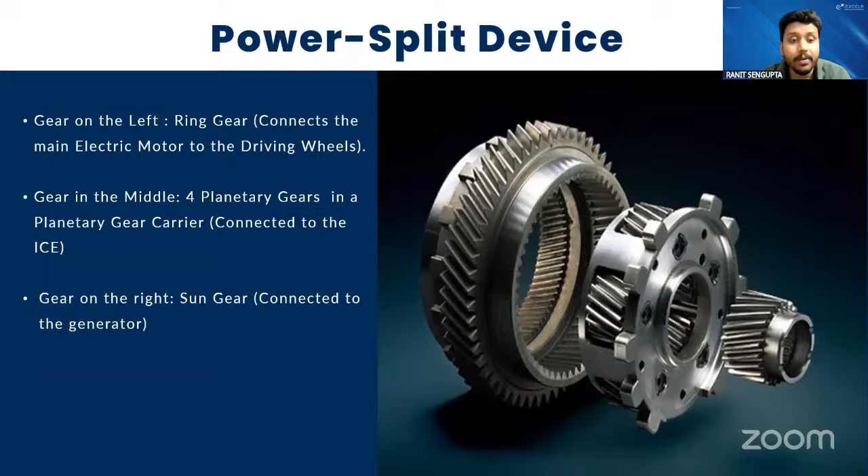So I think you can understand how we are connecting those main components with each other. This is the internal block of a PSD. Now how will it work? Okay, let me share another screen.

So I hope you can see my latest screen. Let me zoom out. I hope you can see the transitions as well.

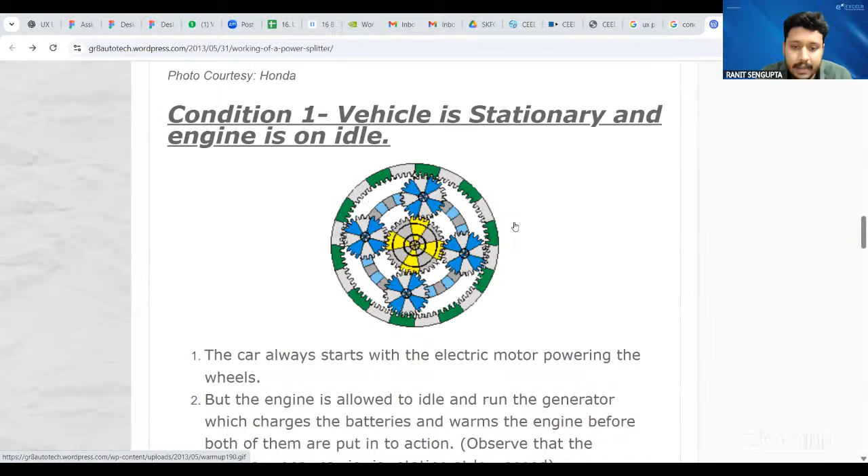As well as you can see that the small sun gear is also rotating, right? And these four gears are nothing but the planetary carrier gears, or we can say pinion gears. So whenever we are starting a vehicle, and mainly I am talking about HEVs, hybrid electric vehicles, on that condition we are not moving, right?

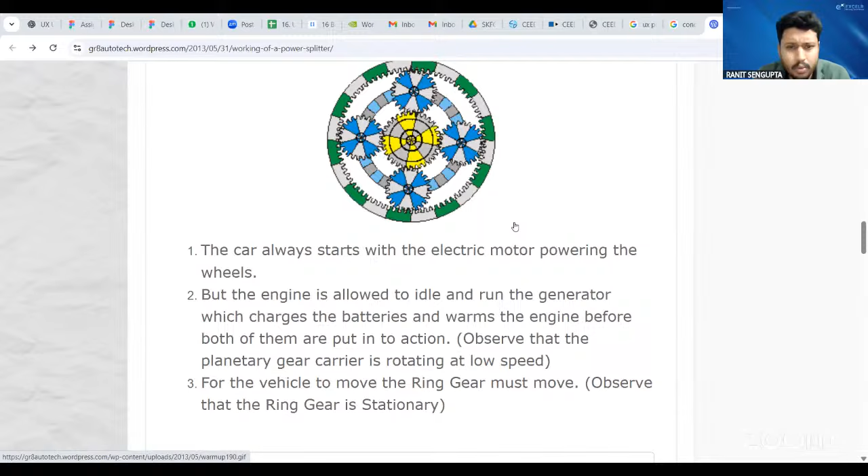And whenever we need a very low speed transmission, or we are in a stationary state, your motor will be in a stationary state. So this is the condition. Now let's see.

Four small gears are rotating because we need to connect the generator with the motor, because all the components should be connected with each other: the carrier gear, the ring gear, and the sun gear. The sun gear is connected with the generator. So please note these three gears, and which component is connected with which gear. Now let's see condition 3, that is the acceleration.

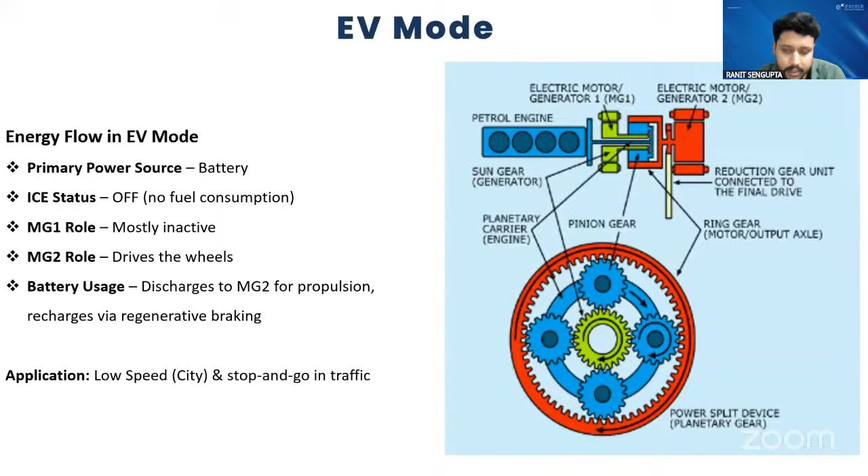And obviously regenerative braking takes place whenever we are doing the deceleration. As yesterday also I told you, there is a difference between deceleration and braking, right? So you can see the application. This type of EV mode application is for low speed transmission, or city driving especially. From the block diagram itself on the right hand side, you can understand how it works, right? Now let's come to the second mode, that is cruise mode.

So cruise mode, whenever you are applying cruise mode, the primary power source would be the engine, and the electric motor will assist, right? So the electric motor is used for assistance only. Here our main power source is the engine, and you can see the application, that is moderate speed, city or highway, where the speed is nearly around 60 kmph, right? 60 or more than 60.

So how does the engine power split go? Obviously the engine power split will drive the wheels as well as generate electricity via the generator, MG1, right? As we know, MG1 is only used for generating the electricity. See, in our normal IC engine vehicles, it may be two-wheeler, it may be four-wheeler, any type of IC engine, do you guys know that we use an alternator to generate the electricity?

As you know guys, there is an auxiliary battery pack we are also using in IC engine vehicles to power the auxiliary loads, such as indicators, headlights, blowers, right? Air conditioning units in a four-wheeler, right? These types of loads come under auxiliary loads, and they are powered by the auxiliary battery pack. I am talking about IC engine vehicles, not an EV.

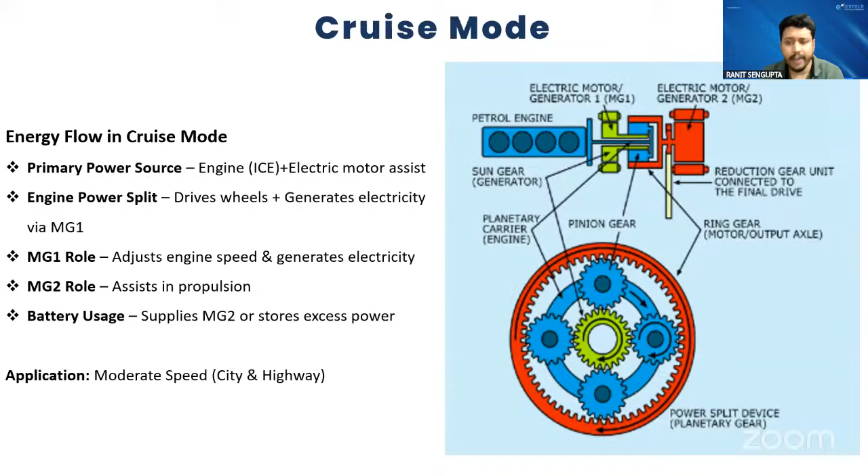Now there is overdrive mode. It is for highway or high speed acceleration only. Suppose the vehicle speed is nearly 100 km per hour, right? In that case, the primary power source is the engine, right? Here we are not turning on our motor, right? So how does the engine power split work? Obviously the engine will drive the wheels as well as generate the electricity.

In this case also, the main work of the generator is to generate the electricity as well as fine tune the engine rpm. See guys, this generator and the electric motor are both connected with a power electronics conditioning unit. We can say this is a controller, right?

So obviously by using this generator energy, we can charge our battery pack, right? And also, here our only main power source is the engine in this overdrive mode. So in that case, obviously MG2's role, meaning the motor's role, is nothing but to assist the propulsion, right? Nothing more than that.

And obviously, if we're talking about battery usage, we are not using the motor, right? We are not turning on the motor. So in that case, the battery may be charged, right? Or it may be in a standstill condition. It depends on the supply and need.

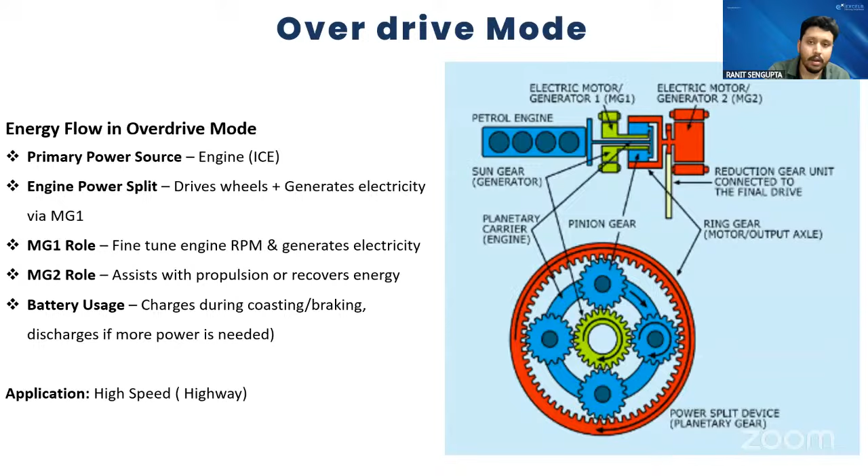Now there is one more mode the manufacturer introduced, that is power boost mode. In this power boost mode, we need the full power of the engine as well as the full power of the electric motor. So here we want to use the battery pack as well as the fuel, whatever it is, petrol, diesel, gasoline. So here our engine power split works the same, driving the wheels and generating electricity via MG1.

Now how does MG1 work? Obviously it generates power for MG2, right? Suppose there is a high need of current. Whenever we are designing this type of HEV, our generator rating is always lower than the motor rating. I have shown you some case studies yesterday as well, parallel hybrid, series parallel hybrid also.

In every case, we have seen that the generator rating is always lower than the motor rating, right? So whenever the motor performs in its high or peak power mode, the generator power is not sufficient. So obviously the battery will be in use. In that case, the motor takes the energy from the battery pack itself as well as from the generator.

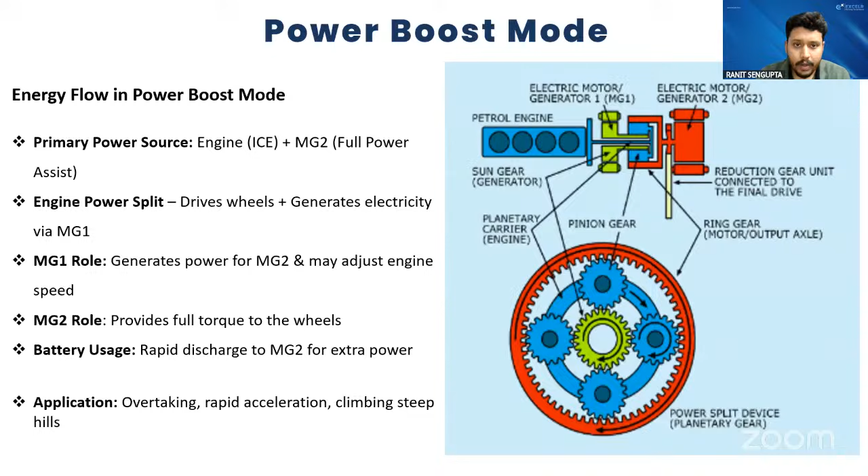There is a question: why do we use two motors instead of one traction motor? It depends on your mode. Whenever there's no need of an electric motor, on an overdrive mode, we don't need an electric motor in that case, but we have to generate electricity to charge the battery pack. We have to recharge our battery pack. So this small size generator is used to generate electricity to charge the high voltage battery pack. In regenerative braking, in case of HEVs, we can hardly achieve 5 to 10% of the lost energy, maximum, and that also depends on the driver. So the main point of using this motor and generator set separately is: when we don't need that much power, the engine will be running, and the generator will be moving and generating electricity to charge the high voltage battery pack. That is the main purpose of using this generator.

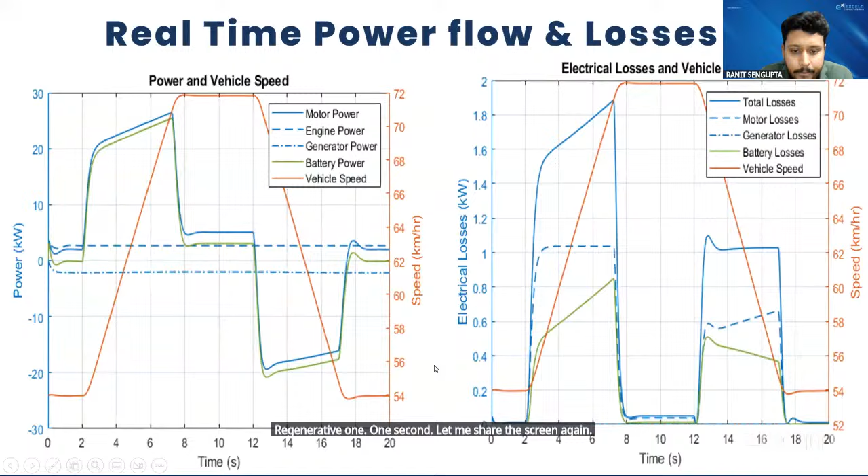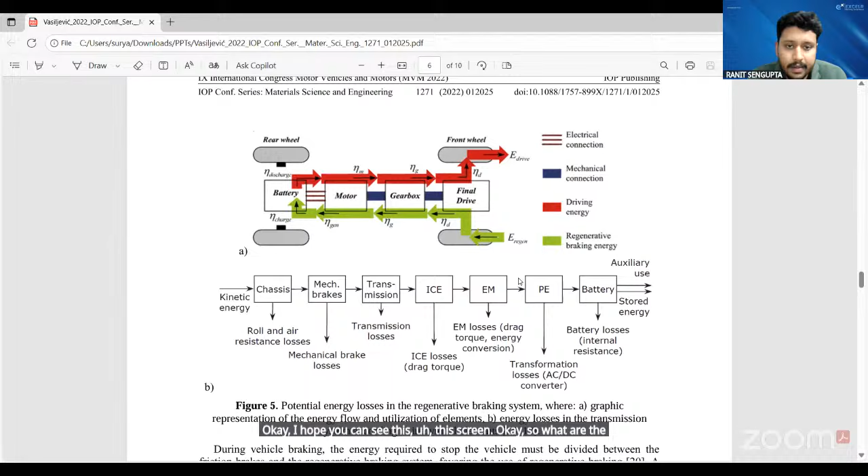Okay, so what are the losses mainly? I will share this paper with you guys, don't worry about that.

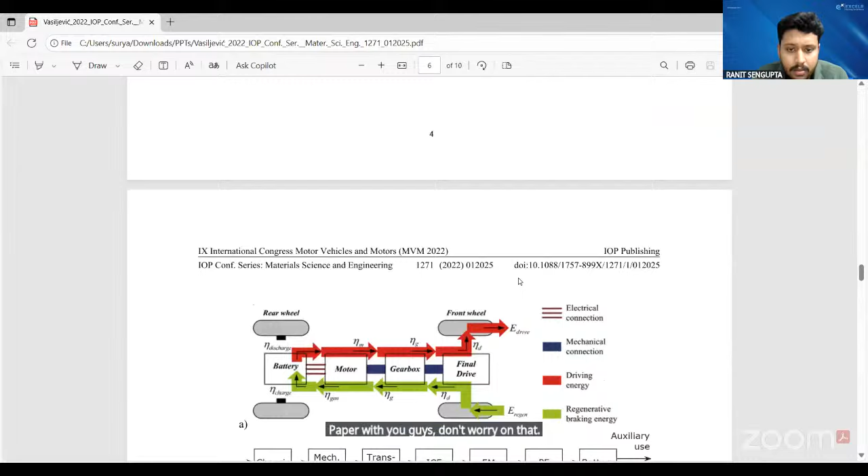On the regenerative braking process, basically kinetic energy is used to generate energy. So how does it work? There's a chassis, and whatever the aerodynamics and chassis design, there will be roll and air resistance losses. After that, there is a mechanical brake loss. Suppose you are applying some mechanical brake, obviously there is a deceleration and you are applying some brake, so there will be a loss.

Suppose you are not applying any mechanical brake, then the losses will be minimal. After that, there is a transmission loss. Then there is an IC engine loss. Since it's a vehicle, the IC engine has its own weight, so there is a drag torque.

After that, there is an EM loss, that is the motor. Whenever we study motor technology, we learn that whenever a motor is running above its synchronous speed, it will act as a generator, and in that case it will generate energy.

In EVs as well, when we're talking about pure EVs, we get more regenerative energy because the motor size is actually increased.

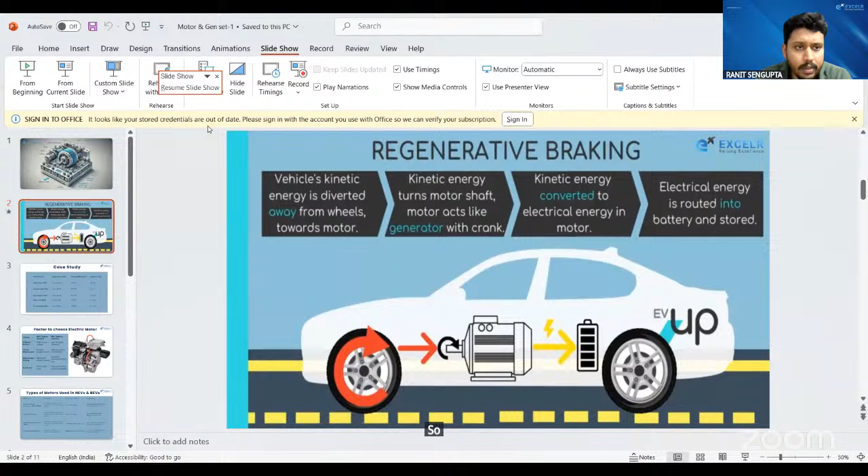So I told you how regenerative braking works. This is a case study on regenerative braking specifically. I have taken 5 models. First, Toyota Prius, a hybrid electric vehicle, HEV. The regain power would be maximum up to 30 kilowatts.

What is the braking efficiency? 50 to 60%. Whenever we drive an EV or HEV, every time deceleration is not possible, so we have to apply mechanical brake. It's driver nature - you will push the brake pedal, that is a mechanical brake. That's why we take the braking efficiency as 50 to 60%.

In case of HEVs versus battery electric vehicles, which we can call pure EVs, the braking efficiency will be more - roughly maximum up to 70%, 65 to 70%. Now, how much range can we gain? In Toyota Prius, the generator or motor size is much lower, so the regain energy is only about 10 to 15%, depending on braking efficiency, friction losses, and aerodynamics.

These 2-3 cases must be considered whenever calculating regenerative energy. For Honda Insight, the regain power is maximum 20 kilowatts, and we roughly gain 8 to 12% of range. In BEVs, the motor rating is bigger because of high initial torque - we need high performance, so we use high-powered, high kilowatt peak motors, and the regenerative power is also higher.

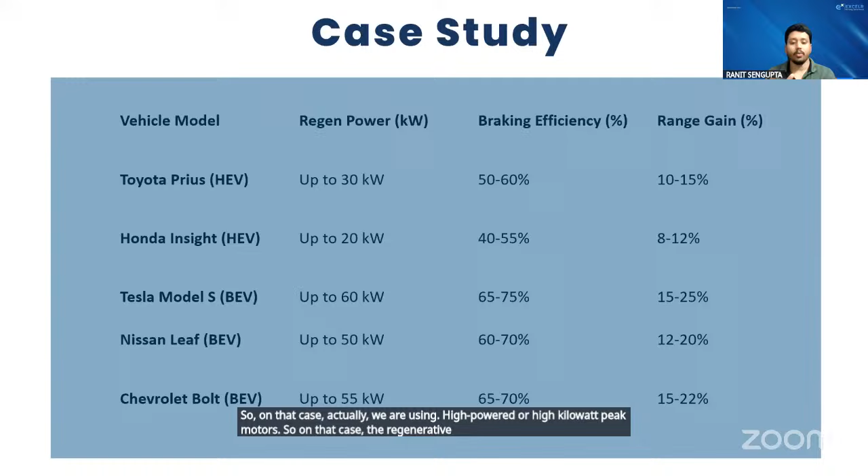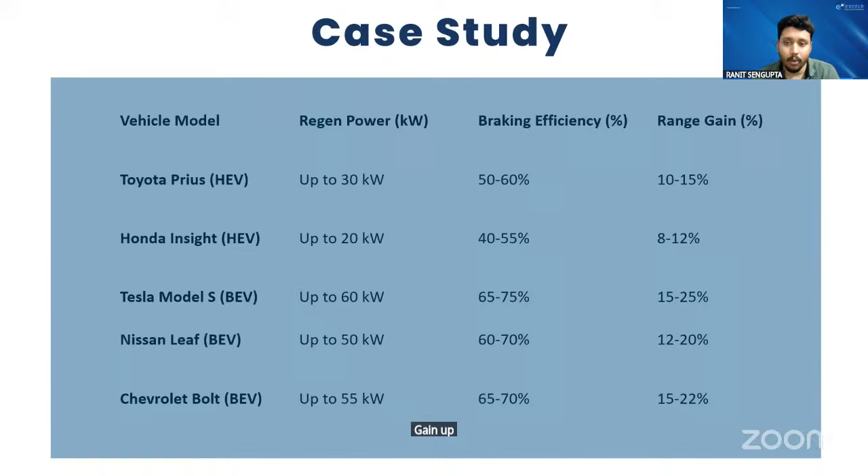For Tesla Model S, we get up to 60 kilowatts of regain power, and the braking efficiency is nearly 65 to 75%, so we can gain up to 25% of the range. Suppose we have a 600 kilometer range - the regenerative energy can add 150 kilometers more.

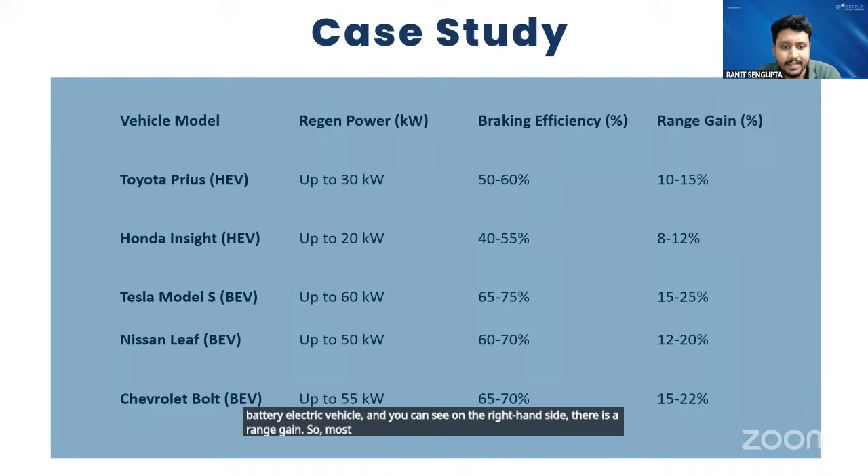So that is the means of regenerative braking work. So in every EV and HEV, we actually have this regenerative braking technology, right? Same for Nissan Leaf, which is also a battery electric vehicle, and Chevrolet Bolt, that is also a battery electric vehicle. You can see on the right hand side the range gain. So most of the BEVs have a higher range gain, obviously. So that is a case study.

Now, what are the factors to choose the electric motor? As one of the students asked, we are using DC motors. For locomotives, actually we were using DC motors for decades, the past 4 to 5 decades we used DC series motors. But now we are transforming from DC motor to AC motor, and mostly nowadays we use AC induction motors. I think we are also planning to do PMSM as well, permanent magnet synchronous motors.

But yes, obviously it needs that type of R&D infrastructure, and also the cost is a factor. Induction motors are very cheap compared to BLDC and PMSM, meaning synchronous motors, because of the rare earth magnets we use. So okay, we will cover this part in the next couple of minutes.

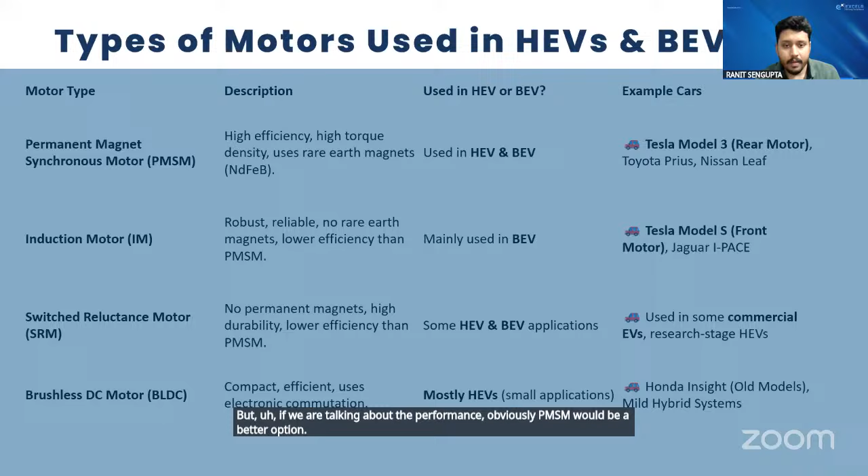Now one of the students asked me why we are not using DC motors. So as you can see, DC motors use brushes, right? There is a brush and commutator we are using. So these two components are reducing the efficiency. Whenever we are using a DC motor, see how an alternator works. Basically in generating stations, as you know, we are using alternators. What is an alternator? That is nothing but an AC generator. AC generator, please note that.

Whenever we are connecting a brush and commutator with this AC generator, it will convert the AC to DC. So primarily we are generating an AC wave, right? And after connecting this brush or commutator, we are getting the DC. So obviously there would be a loss. So in case of AC motors, we are getting nearly 90 to 95% efficiency. But in case of DC motors, due to these two components, we are getting roughly 80% to 85% efficiency. So there is a 10 to 15% gap in the efficiency. So that is why we are not using any type of DC motor in EVs especially.

And you can see that DC motors are much bulkier than AC motors at the same power rating. Suppose we have a 100 kilowatt DC motor and a 100 kilowatt AC motor. So obviously there would be a huge weight difference, right? Because of this brush and commutator.

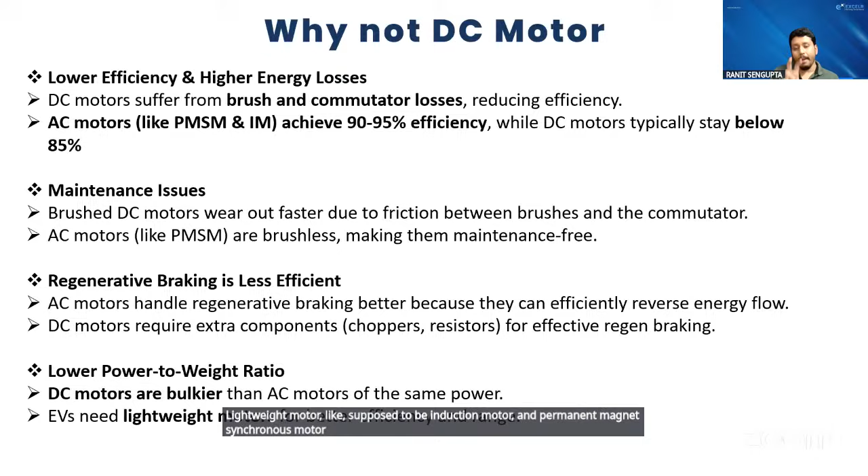So in case of EV applications, we mainly have to decrease the weight. If we can decrease the weight, we can get a very good range. We can improve the range, right? So our main focus is to get the better performance. That is why we are using lightweight motors, like induction motors and permanent magnet synchronous motors. So that is the main disadvantage of a DC motor.

Now induction motors, actually we are using them, right? Basically, how does an induction motor start? Don't focus on the three idiots part, right? How induction motors start: three phase induction motors we can easily start, but single phase induction motors need an external starter, right? So obviously for a three phase induction motor we don't need any kind of starter.

It can start easily. So basically, see, there is a stator and there is a rotor. I am specially sharing these two things for the other branches; mechanical branches also know about it. So the stator is a static part and the rotor is a rotating part. In every motor there is a stator and a rotor, and the rotor is obviously a rotating part and the stator is a standstill part.

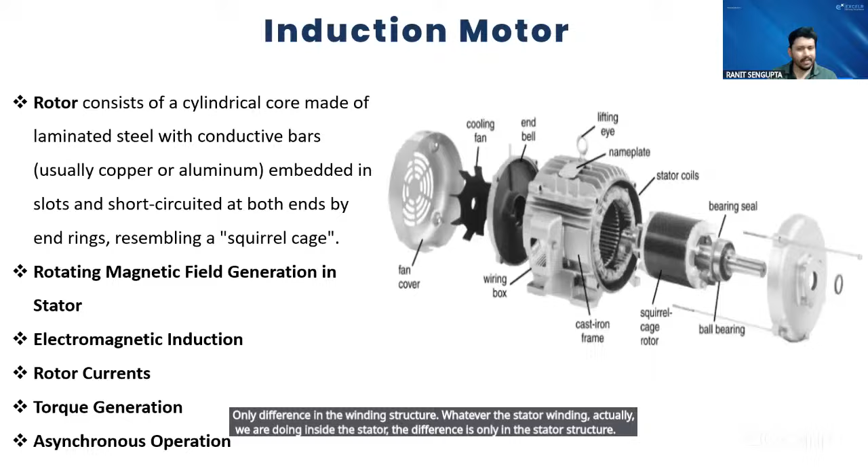Just by replacing the squirrel cage rotor with a rare earth magnet, we can develop the PMSM and the BLDC. PMSM and BLDC are nearly the same. The only difference is in the winding structure, the stator winding we are doing inside the stator. Everything else is nearly the same.

It depends on your speed requirement how many poles it should have. Whenever there is a higher number of poles, the speed will be lower. It is an inversely proportional condition: speed is inversely proportional to the number of poles. If you choose a lower number of poles, your speed will be higher.

There is a maximum speed range. Suppose we need 10,000 rpm; we have to rotate our motor at 10,000 rpm. So you have to design the motor in such a way that you can get maximum 10,000 or 12,000 rpm. That is a part of motor designing. We have to choose the rotor poles accordingly. There is also a dependency on the frequency.

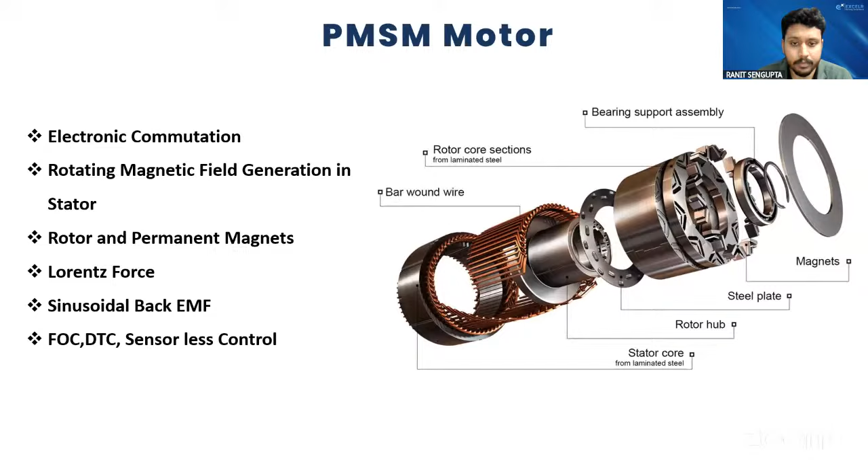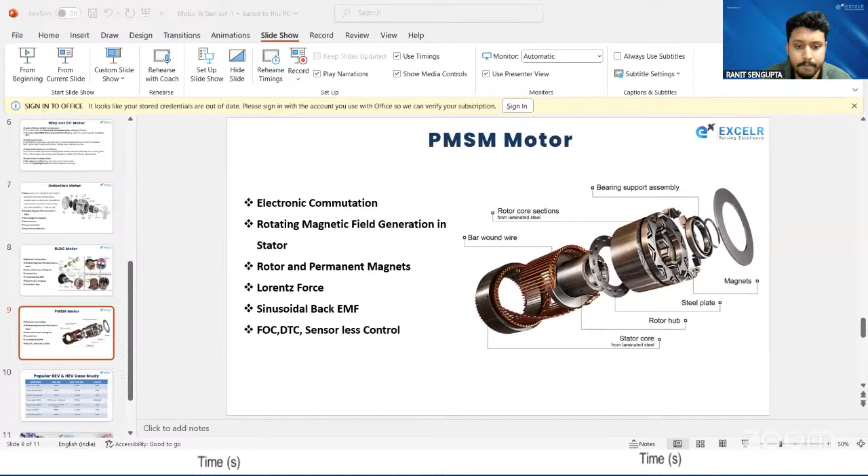Okay, one second. Just give me 1 minute. Oh, 1 second, I am sharing my screen. Please give me feedback. Okay, sorry, what I am sharing. 1 second, guys. There is an issue. Okay, I hope you can see my screen, the car view, right? And please give me feedback whether you are getting the video sound or not.

Tesla engineers made a stunning design choice when they developed the Tesla Model 3. They abandoned the conventionally used, well-proven induction motor. Are you getting the video sound, guys? Please.

Okay, very good. Let's see this new technology that was developed by Tesla just a couple of years back. That is a permanent magnet synchronous motor and a switched reluctance motor. Means we are using both types of motors, right? And we are developing a new motor technology, that is PMSRM. So let's see how all the motors work, as well as how this motor works.

So this is the most efficient motor the EV industry is using nowadays. Obviously, it is very much costlier also. That is why the Tesla cost is pretty high, right? But the performance is phenomenal. BYD is also using this type of motor nowadays. Okay, let's watch this video.

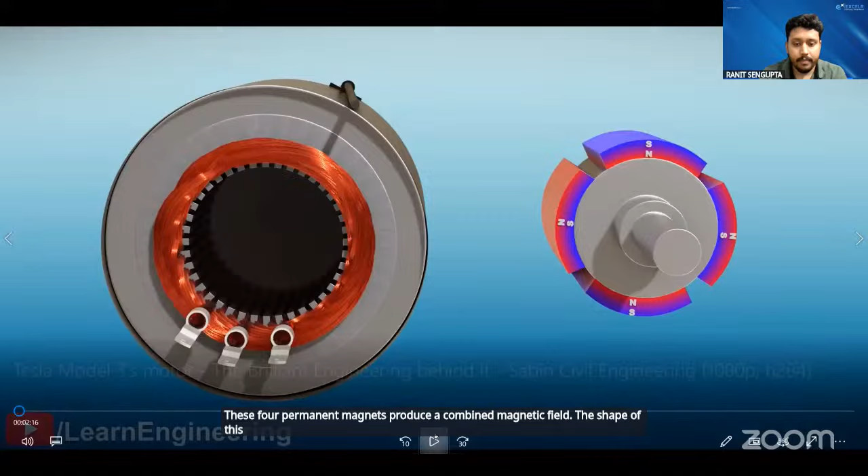See, guys, as you have seen a little bit of the video, whenever we are using the squirrel cage type, we are using aluminum or copper conductors, right? So our main purpose is to turn those copper bars or aluminum bars into a magnet. So externally we are generating the magnetic field inside the rotor. It makes sense, right? Whenever we replace this with a permanent magnet, we don't need to generate the magnetic field, it already has the magnetic field. So it is absolutely clear why PMSM and BLDC are more efficient than induction motors, right? So let's watch this.

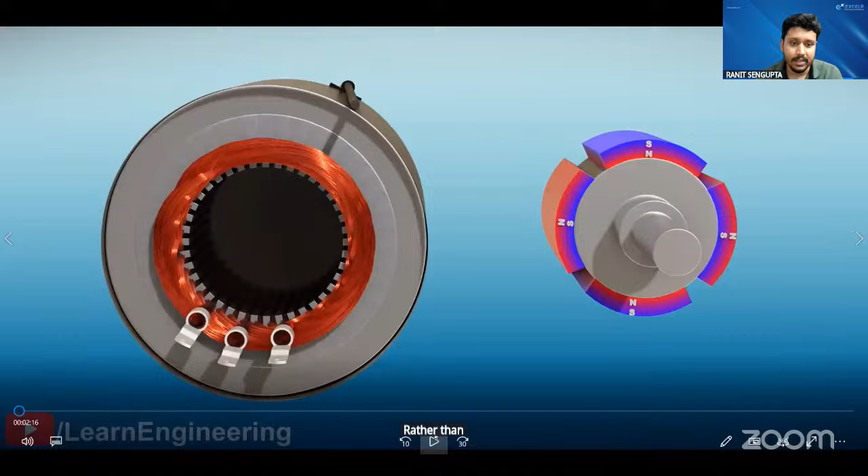Guys, the main motive: why do we want to reduce this back EMF? Obviously we know that in a motor there is a core loss, right? There is a core loss and there is a copper loss. Copper loss is associated with the stator winding, where we are using conductors or wires. In the wires we have resistance. So depending on the current rating, there would be an I squared R loss. So that would be our copper loss.

And in the magnets, there is a core loss. In case of induction motor there is core loss, and in PMSM there is also core loss. But in case of induction motors, we are using copper or aluminum bars, right? So there is a current flowing through the copper and aluminum bars. Depending on the copper or aluminum bars' resistance, there would be a rotor loss, which is pretty high compared to the permanent magnet synchronous motor, or we can say the permanent magnets.

But in the permanent magnets there is a core loss, right? There is an eddy current loss and there is a hysteresis loss. These two types of loss are associated with the magnetic flux. So whenever we are doing a very high speed rotation, obviously the rotor is the main rotating part, so that means your magnet is also rotating.

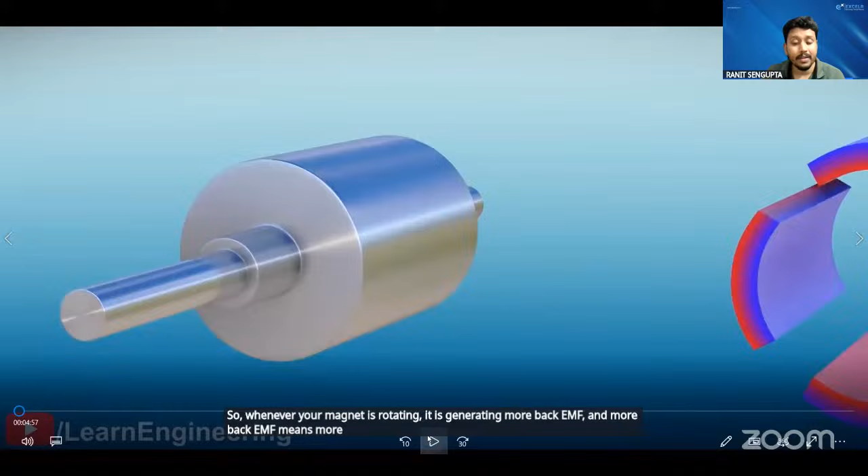So whenever your magnet is rotating, it is generating more back EMF, and more back EMF means more losses, more core losses. So that is the main motive to develop this new motor technology, to reduce the back EMF at a higher speed.

Yes, PMSM is better. It has a very high initial torque. But suppose the vehicle is running at 100 kilometers per hour, 120 kilometers per hour, in that case the rotor rotation is very high. So in that case, it will be overheated, and it would act like a lossy component, right? So that is why we are developing this technology.

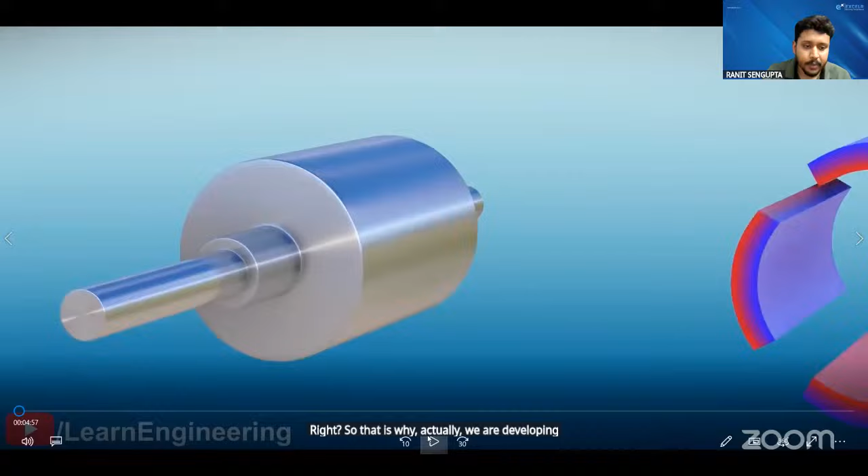Okay, let's watch. See guys, why are we not using only a synchronous motor? That doesn't have permanent magnets, right? I am talking about the synchronous reluctance motor. This type of motor doesn't have any type of magnets, right? In that case, we are using iron bars or steel bars, right? Sorry, conductive bars.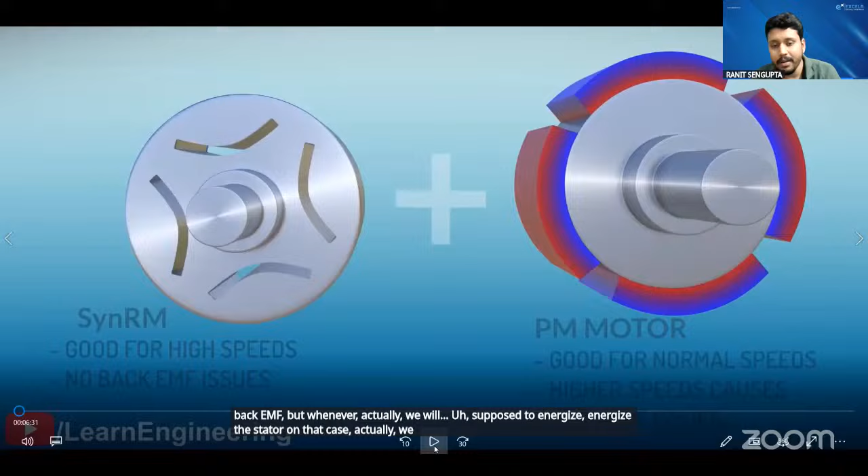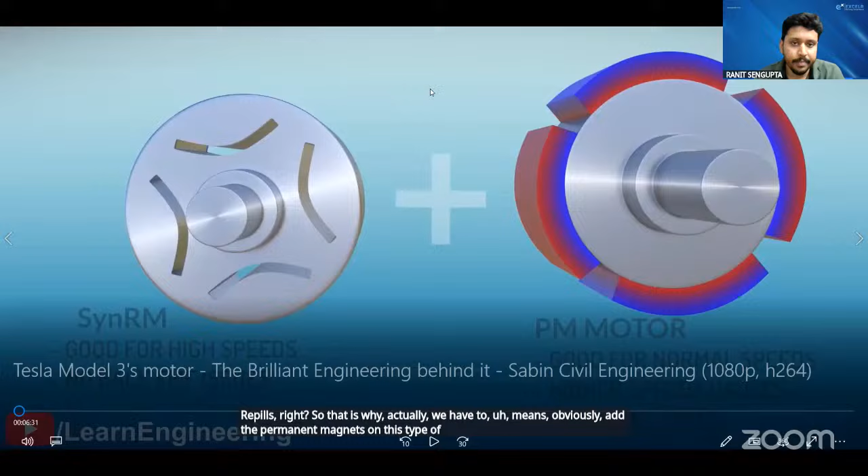So whenever we start this type of motor, there is a very low starting torque, and there are torque ripples and current ripples. Obviously there is no back EMF, but whenever we energize the stator, we will observe ripples, right? So that is why we have to add the permanent magnets in these cut slots, right? So let's watch this overall video.

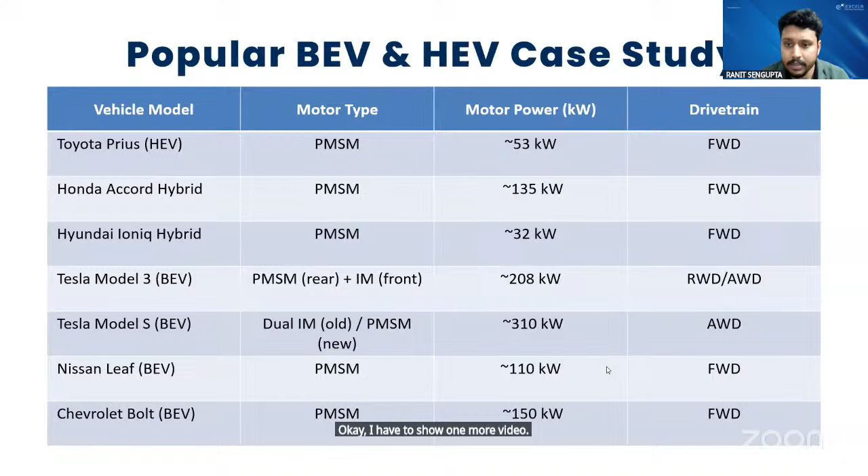Okay, I have to show one more video. One second. Basically, I want to show the Toyota Prius hybrid mechanism. One second, I'm just sharing those videos.

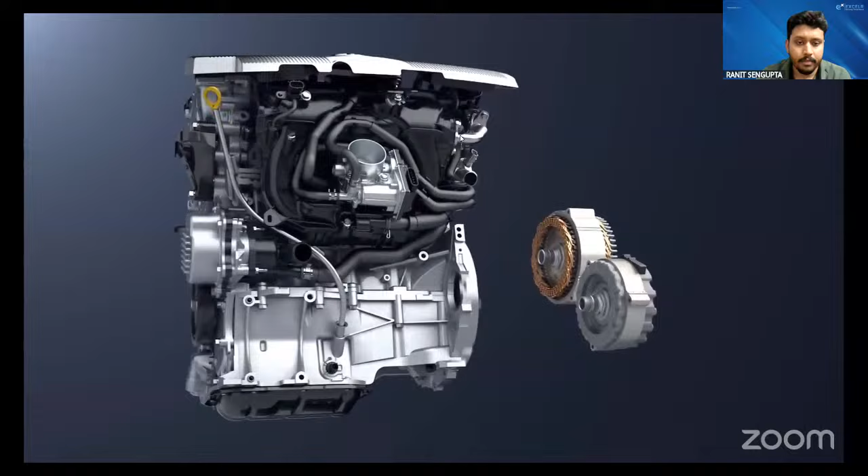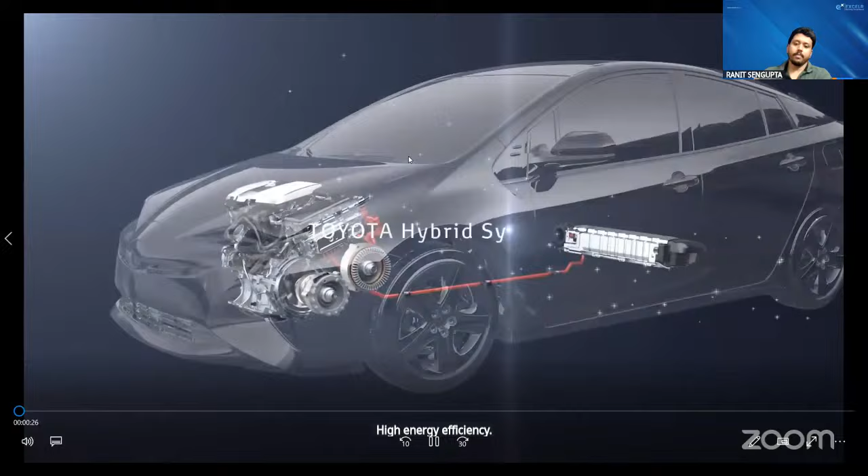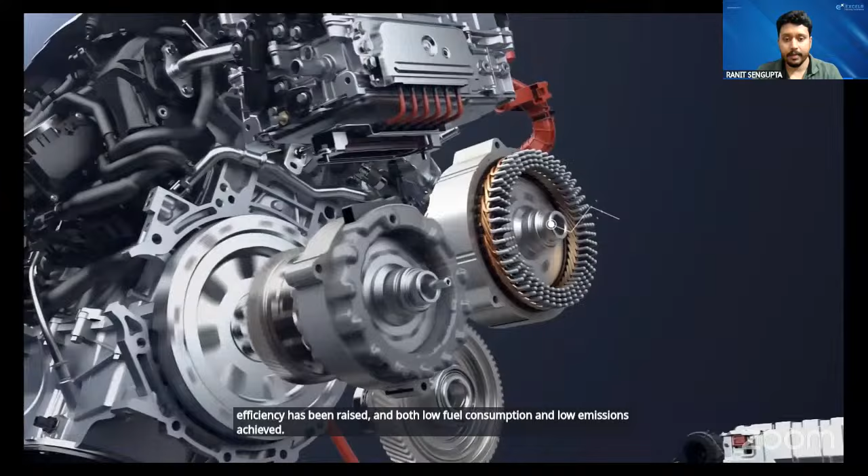Engine and motor. This system combines these with the power split device to achieve high energy efficiency. This is the Toyota hybrid system. Each unit has been developed specially for the hybrid system. For the engine, the maximum thermal efficiency has been raised and both low fuel consumption and low emissions achieved. The motor is compact and high efficiency to achieve smooth acceleration. The generator uses the engine rotation to generate electricity, which is sent to the motor and the drive batteries. It is also used as the engine starter and provides smooth engine starting.

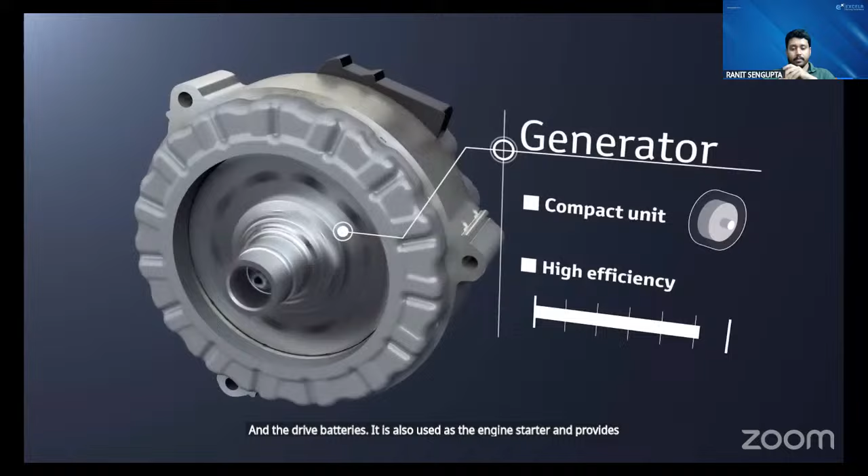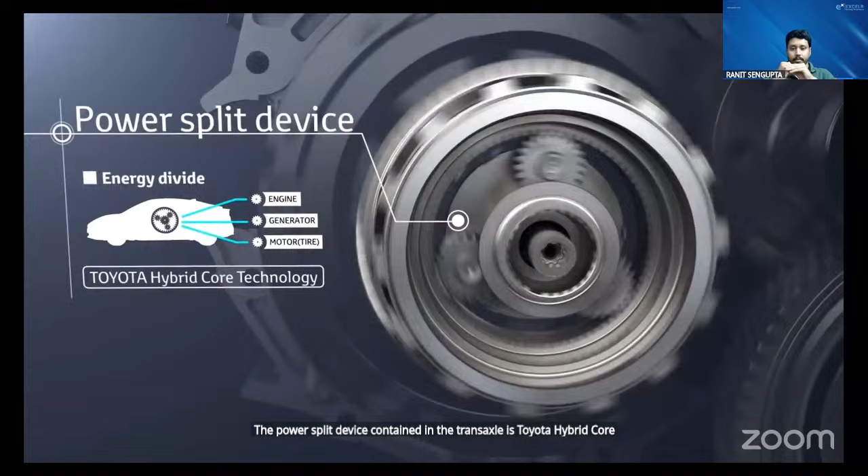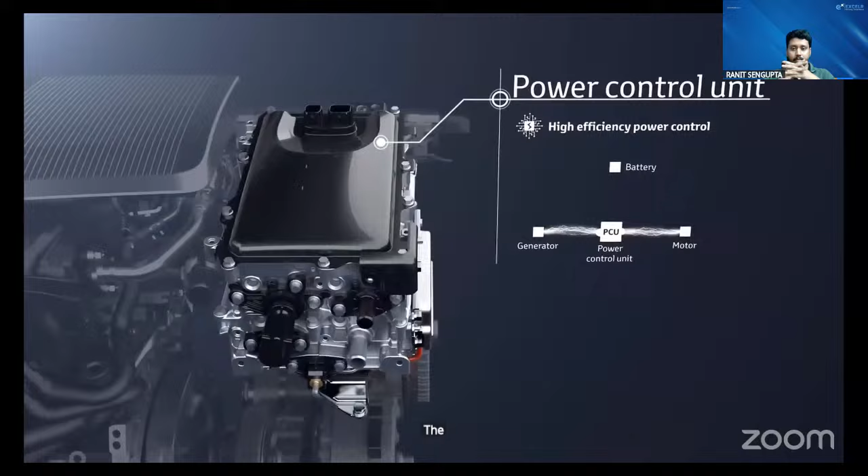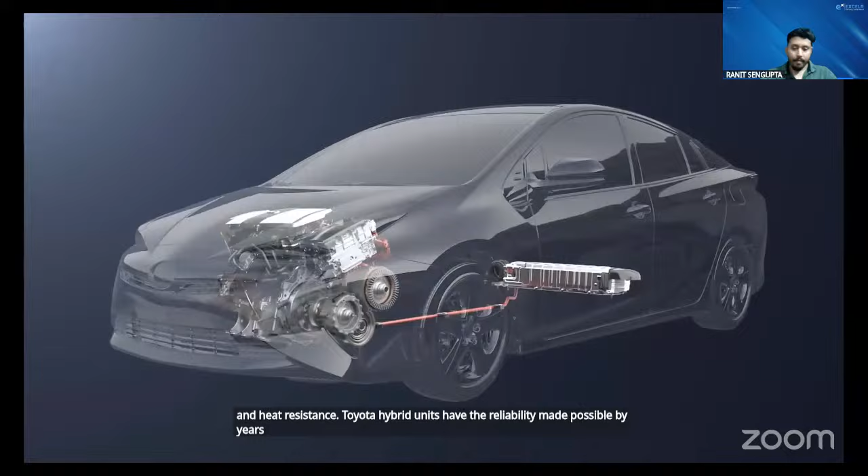The power split device contained in the transaxle is Toyota hybrid core technology that divides the energy output from the engine between electrical generation and driving according to the driving conditions. The power control unit is the core of the hybrid system. It controls the electricity to provide appropriate amount to each unit. The drive batteries store the generated electricity and supply it to the motor to drive the vehicle. There is no need to recharge from an outside power source or to replace the batteries periodically. They also provide superior durability and heat resistance. Toyota hybrid units have the reliability made possible by years and years of design development and continuous progress.

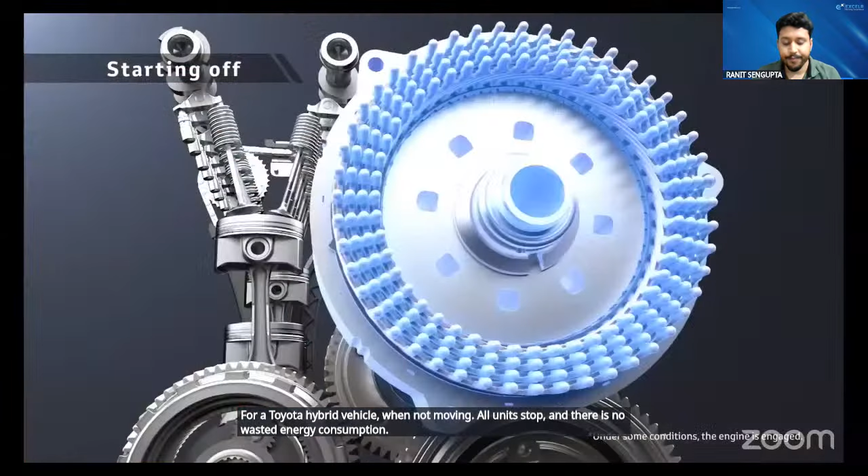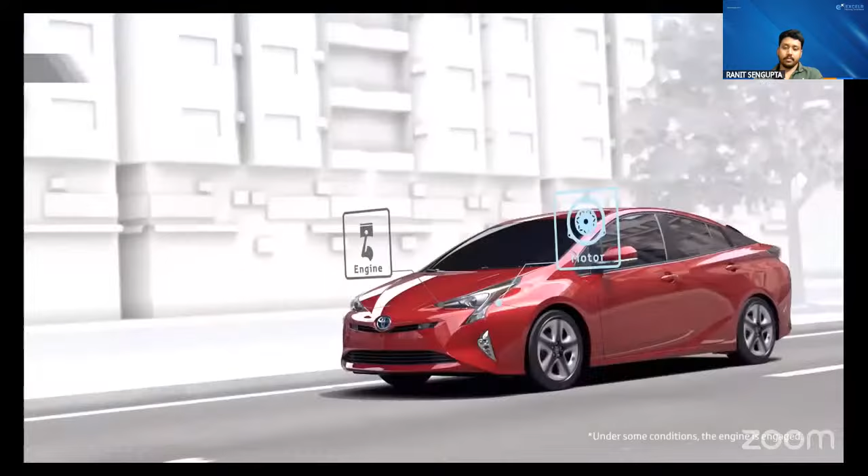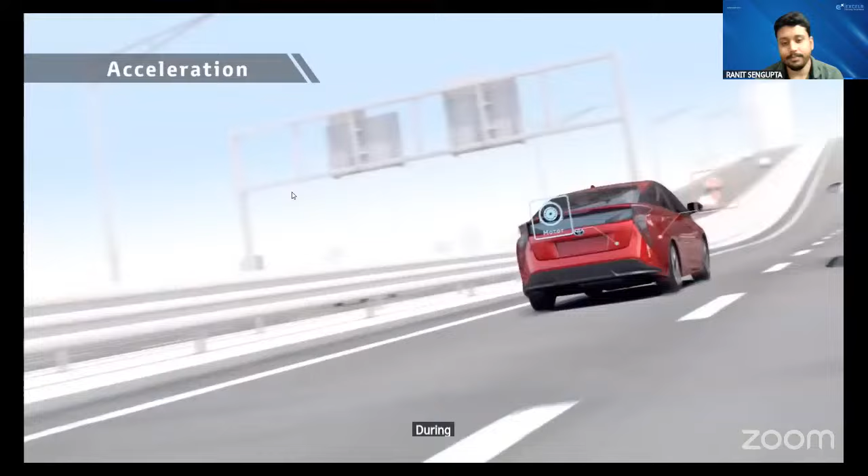For a Toyota hybrid vehicle, when not moving, all units stop and there is no wasted energy consumption. When the vehicle starts off, the motor drives it quietly and smoothly. For driving at low speed, the motor is used to achieve low fuel consumption. During acceleration, motor drive is combined with engine drive in a rotation range with good engine efficiency to drive the vehicle powerfully, yet with low fuel consumption.

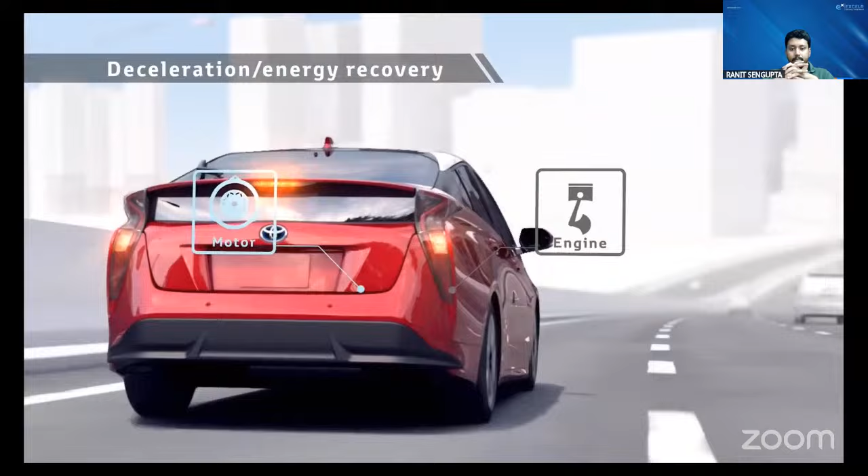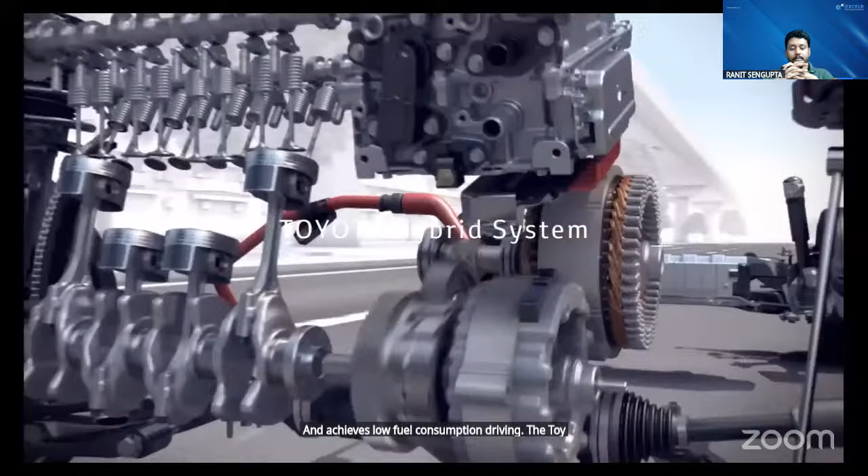The engine drives the vehicle and charges the batteries at the same time to raise the energy efficiency. During deceleration, the rotation of the tires drives the motor to generate electricity to store the power into the batteries for reuse. In this way, a Toyota hybrid vehicle runs the engine in a rotation range in which the engine has good efficiency and that matches the driving conditions, and reuses energy that has been wasted until now, achieving low fuel consumption driving. The Toyota hybrid system is advanced technology that achieves both driving fun and superior environmental performance.

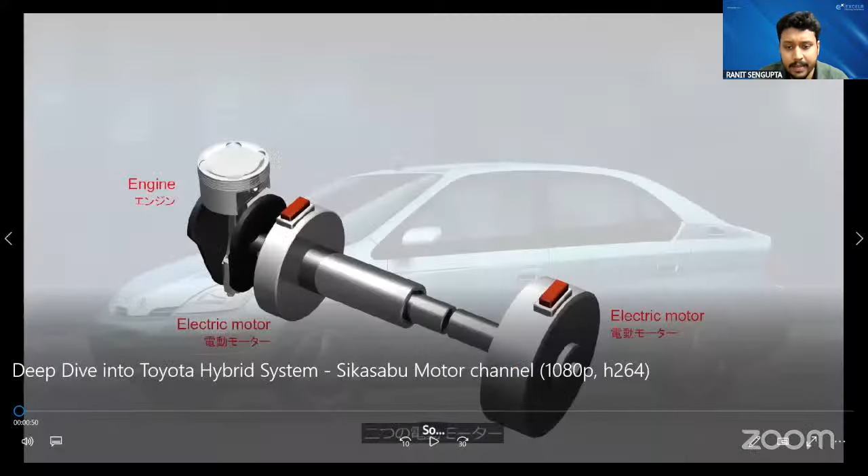Let me share screen once again, guys. So this is basically a video on how actually those gear systems work, planetary gears and whatever the gear system we have discussed at the start. So let's watch this also.

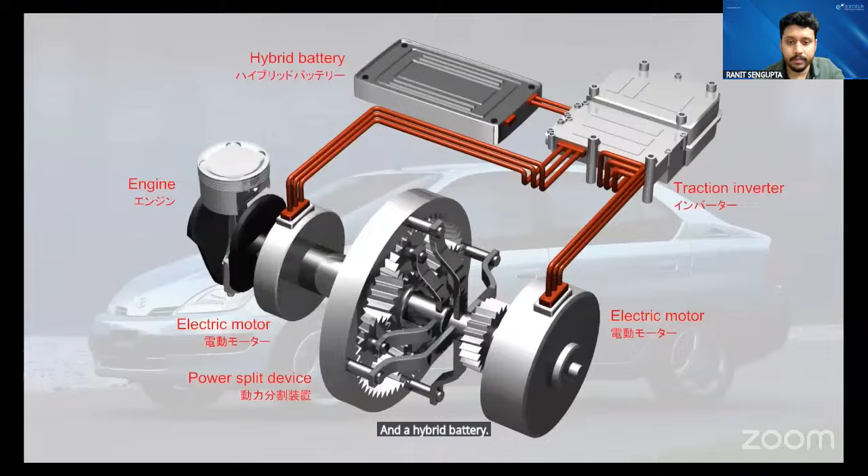A planetary gear set as a power split device, a traction inverter to control the electric motors, and a hybrid battery. Before going into details, we will first learn briefly about the operation of planetary gears. A planetary gear consists of three main components: an internal gear, a sun gear, and a planetary carrier, along with planetary pinions that rotate as a unit with the planetary carrier. By assigning input, output, and fixed roles to these three components, it is possible to increase speed, reduce speed, or reverse rotation.

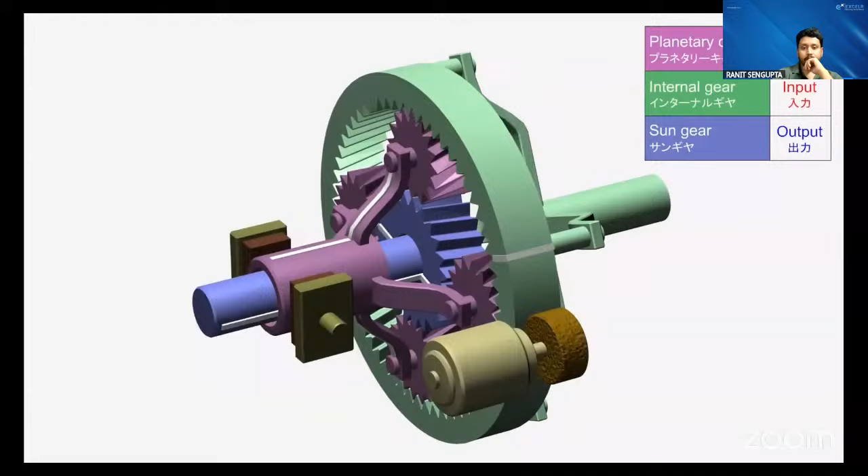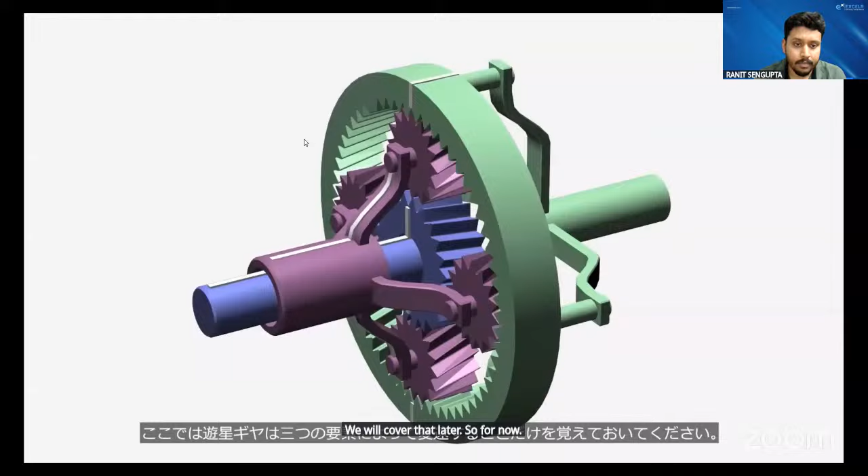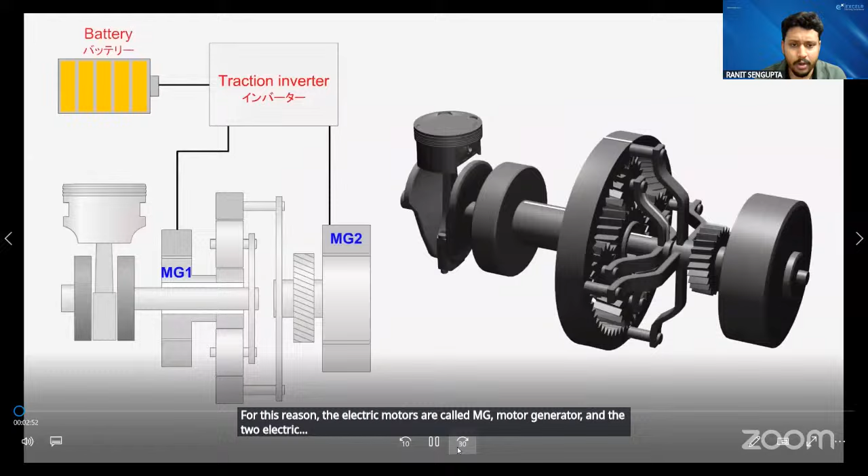Step-type automatic transmissions shift gears using this function of the planetary gear set, whereas the Toyota hybrid system utilizes a different function, which we will cover later. So for now, just remember that the planetary gear set shifts using three elements. In the Toyota hybrid system, the two electric motors switch roles between generating power and producing output depending on the situation. For this reason, the electric motors are called MG, motor generator. Let's take a look at how the hybrid system operates under various driving conditions.

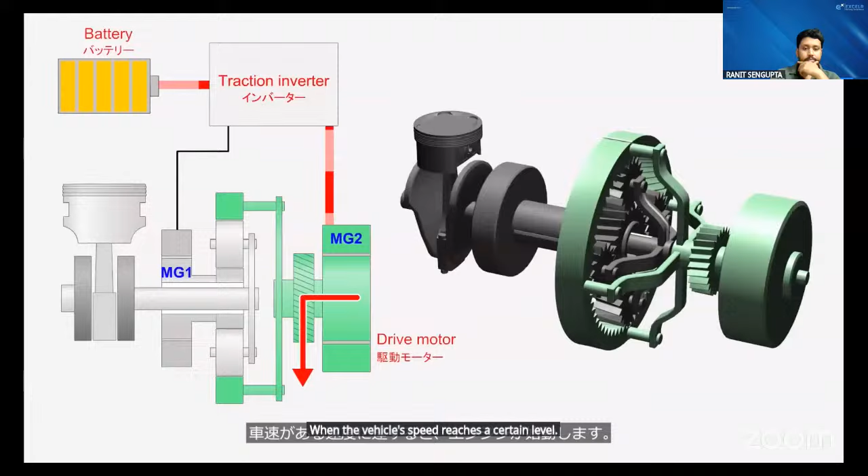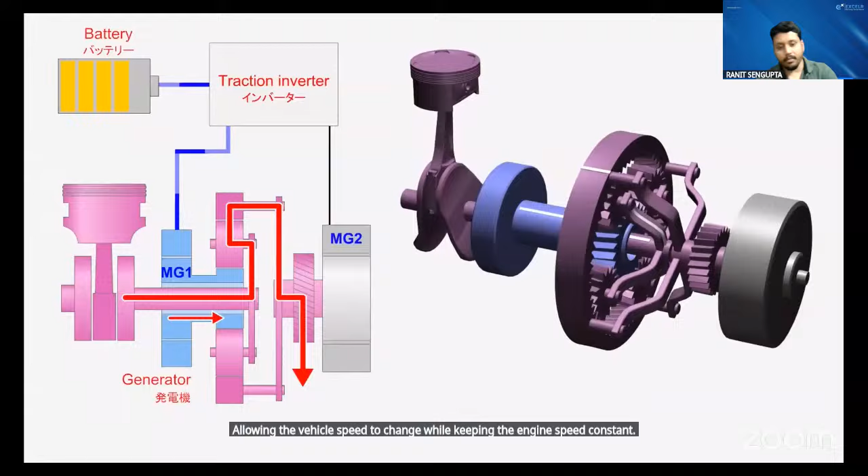During acceleration from a stop, the vehicle is driven solely by the output of MG2. At this time, since the engine is off, the planetary carrier is stationary, while the planetary pinions and sun gear rotate freely. When the vehicle speed reaches a certain level, the engine starts. For engine startup, MG1 operates as a starter motor and rotates the engine via the planetary gear. When driven by the engine alone, the engine's output is transmitted to the differential gear via the planetary gear and MG2 shaft. At this time, the planetary gear functions as a continuously variable transmission (CVT), allowing the vehicle speed to change while keeping the engine speed constant. The planetary carrier is connected to the engine, the sun gear to MG1, and the internal gear to the wheel.

So basically it works on CVT, right? Continuous variable transmission.

So, okay, there is one question: please give some information about how a bike will be implemented as EV. See, Kaushik, we already have EVs, right? Bikes - Revolt is there, Joy e-bike is there, Ultraviolette is there. So there are multiple EV bikes we have in the industry. I think Hero also developed one, but I think that is a Scooty. So obviously the two-wheeler market is wide.

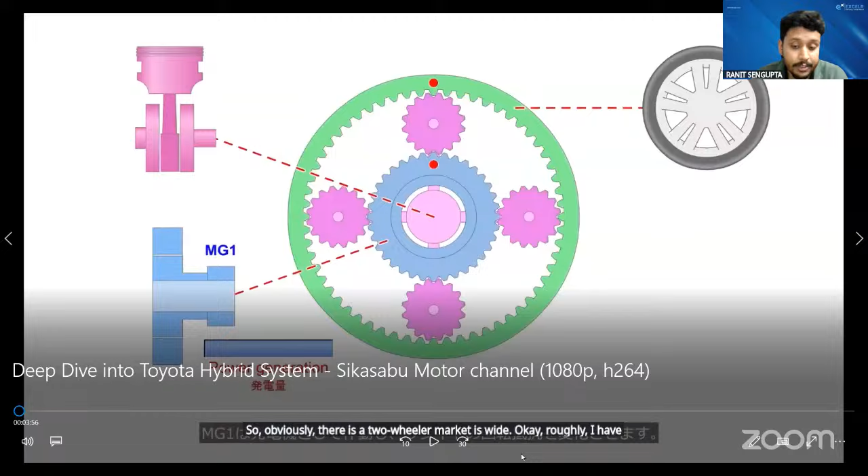Okay, roughly I have to share how continuously variable transmissions actually work. Let me second.

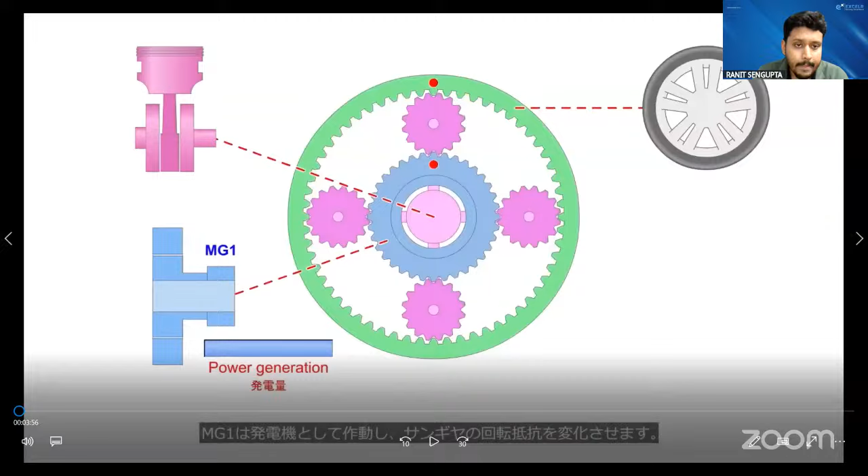Continuously Variable Transmission, or CVT, is a type of automatic transmission that is commonly utilized in passenger cars.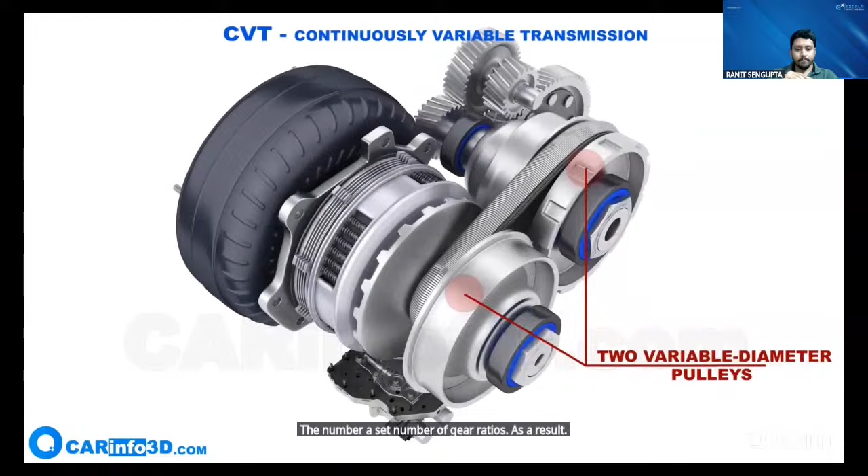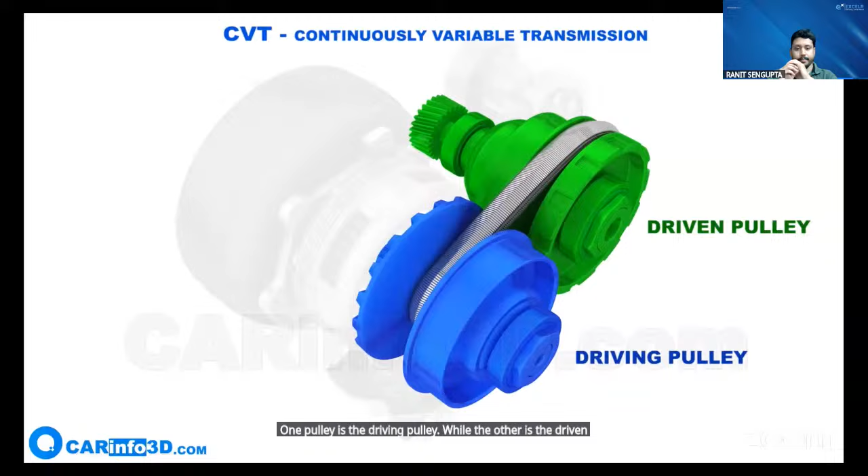One pulley is the driving pulley, while the other is the driven pulley. Transmission between the pulleys is accomplished by the use of a special belt or chain. In this example, it is a steel belt made up of multiple links.

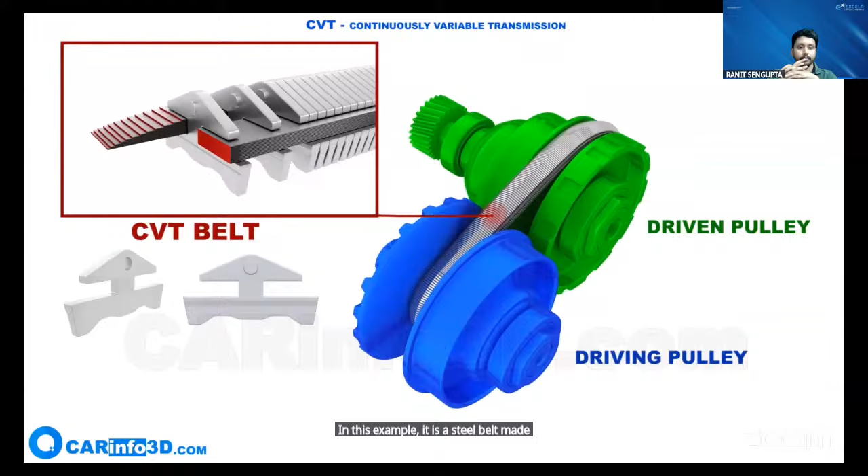Each pulley has two halves, one movable and one fixed, to adjust the gear ratio. The movable halves of the pulleys are propelled by supplying or draining oil from the chambers behind them.

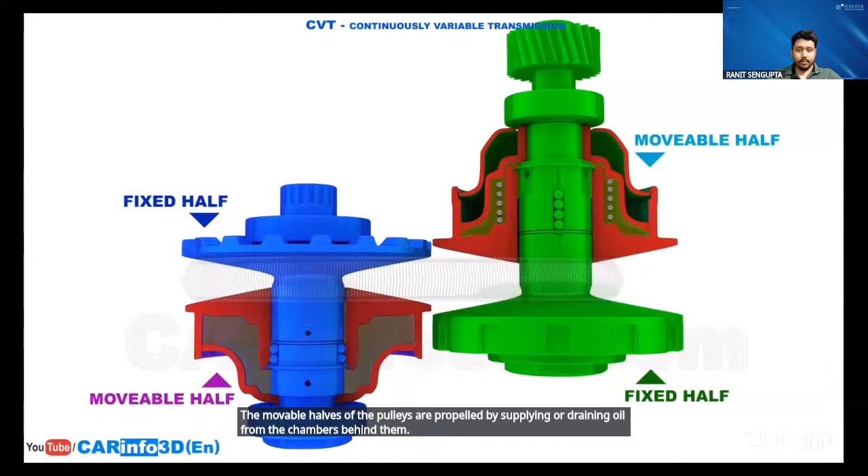When the movable halves change their position, the belt travels toward the inner or outer radius of the pulleys. The gear ratio is determined by the difference in radius between the driven and driving pulleys.

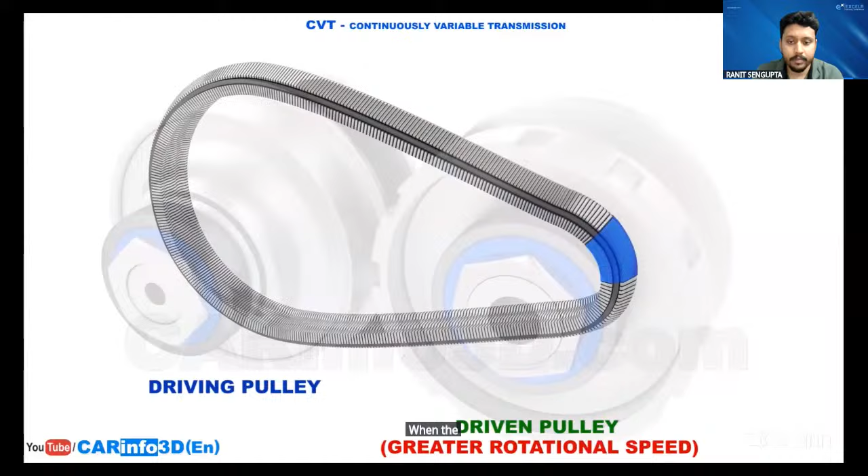Thus, the driven pulley is now rotating faster than the driving pulley. When the belt is reversed, the driven pulley rotates more slowly than the driving pulley.

Proper functioning necessitates synchronized movements of the movable halves in order for the belt to stay consistently tensioned and not slip.

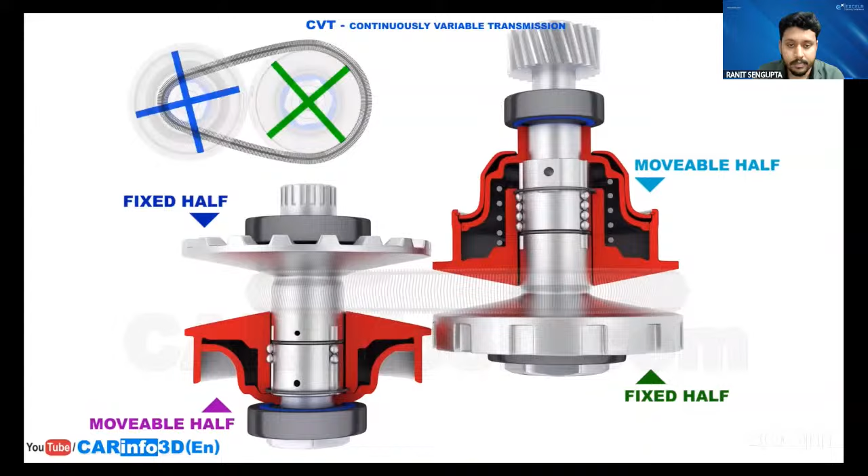The reverse gear requires a separate mechanism. Typically, a planetary gear is utilized for this purpose. It has one forward gear and one reverse gear.

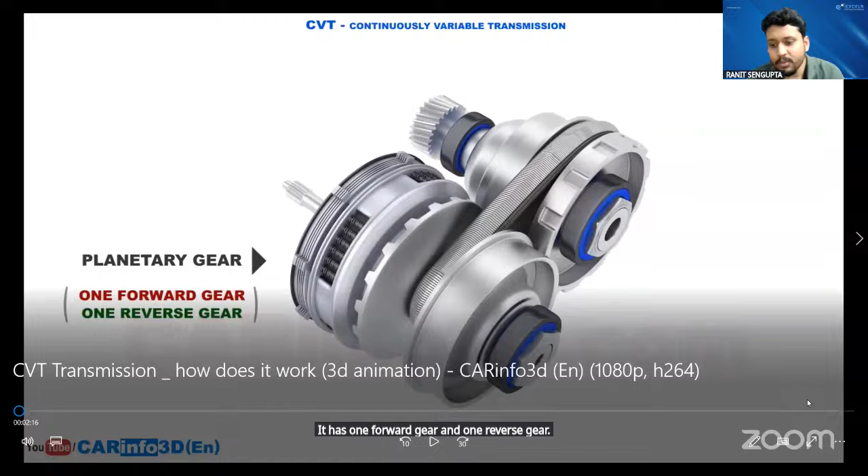So guys, that is basically how the CVT works, continuous variable transmission. Most of the EVs and HEVs actually use the same CVT system, right? Whichever mode we are choosing, depending on that mode, it will act.

In case of IC engine based vehicles also, we have the same CVT, in automatic cars. You already know that in the market there are widely available automatic cars, like scooty, right? So cars actually use CVTs, continuous variable transmission.

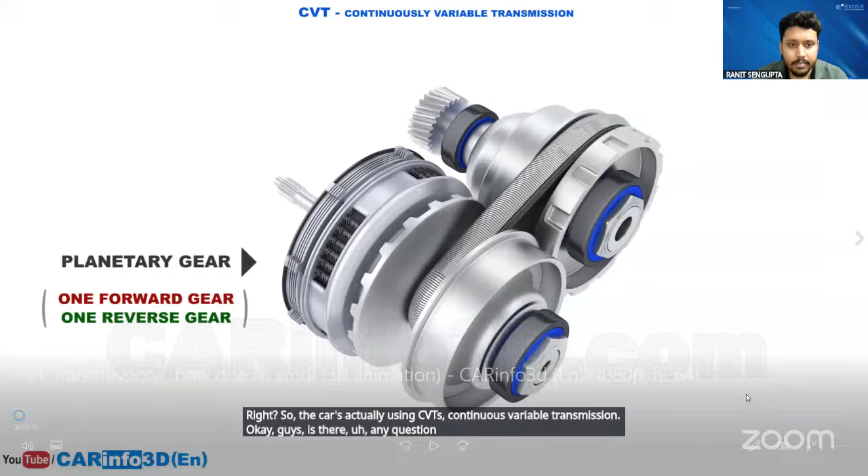Okay guys, is there any question on this? Any type of questions like motor? Already we have covered a lot of things today, the motor technology, the other parts, which type of motors we should use.

Yes, planetary gear system is also used in EVs. No, CVT also we are using planetary gears. Planetary gear we are using also, in case of HEVs we are using it, we are not using it in EVs. Planetary is only used for IC engine based vehicles, right? So in HEV there is an IC engine, and in a normal IC engine obviously we are using planetary gears.

Okay, is there any question further? Okay, you're talking about the video.

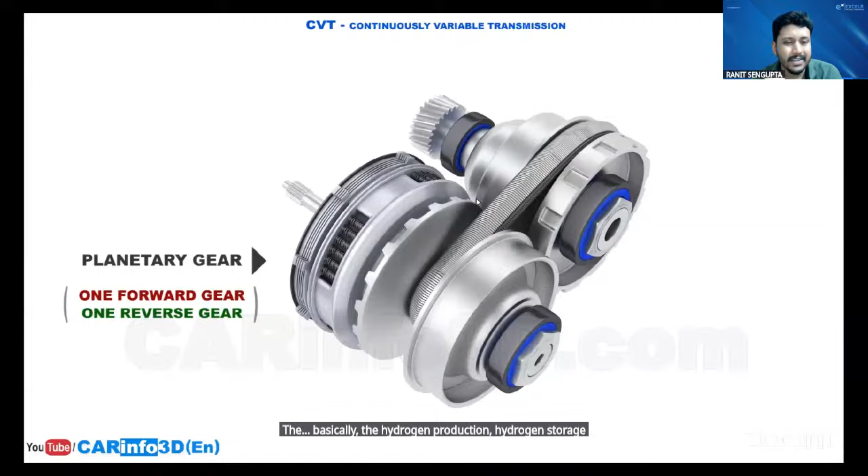Does manufacturing the battery cause more CO2 emissions? Yes, whenever we are manufacturing cells, especially the lithium battery pack, and extracting lithium from mining, CO2 emissions are more, but not more than what IC engines emit in carbon over their overall lifetime.

What can I do about excess heat of the battery? There will be a separate class session on the thermal management of the battery pack. Don't worry about that, I will take care of that part as well.

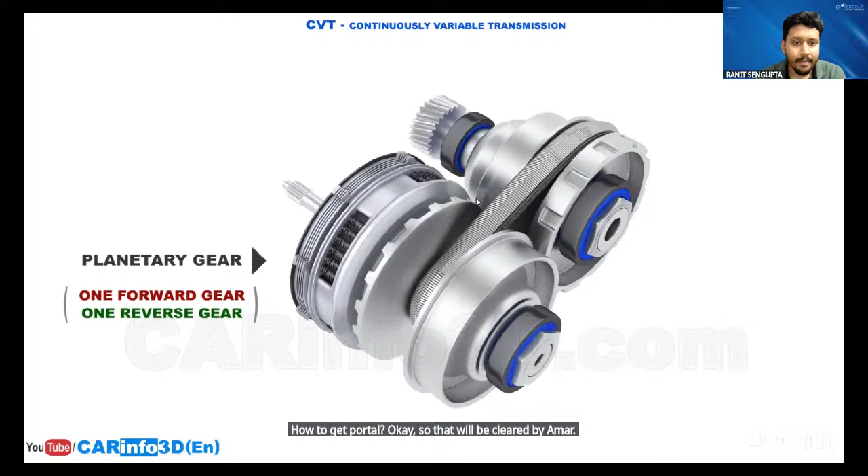Which is more reliable for long-term usage, HEV or BEV? See guys, HEV is long-term usable, but for BEVs, manufacturers are giving warranty for 6, 7, 8 years. But battery performance is degrading; in 3-4 years the battery performance actually degrades. So as per the current scenario, you can invest in HEVs.

Any update on silicon carbon battery in vehicles? No, silicon carbon is being introduced basically in smartphones. For vehicles on a large scale of manufacturing, it has not developed yet. Research is going on, but yes, it can be developed.